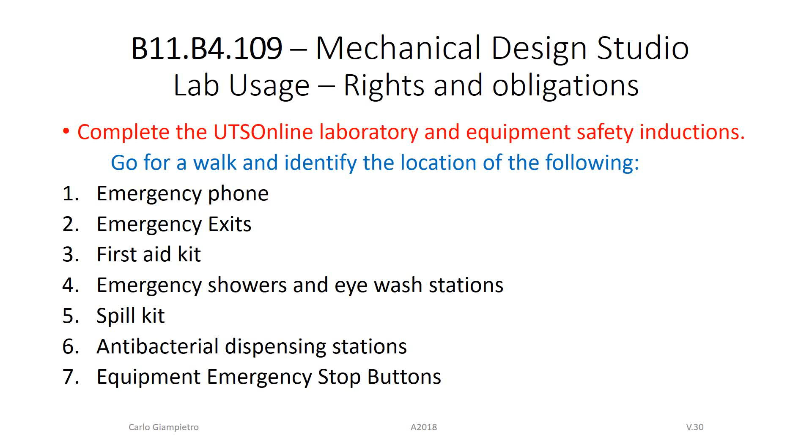Once again, the location of the mechanical design studio is going to be at building 11, the same building we have the lecture in. It's at B4, where you can use elevators 1, 2, and 3 to reach basement 4, and the room number is 109.

In the event of an emergency, if your lab supervisor is not available, you are going to dial 6 to contact security.

You have to remember to always return the tools to the designated storage areas, keep the floor area tidy and free from obstructions, always clean up the area once you've completed your activity, and always wear covered footwear when in the lab area.

The lab supervisor has the right to restrict entrance to the lab if you don't have covered shoes. Always wear eye protection when operating tools or machinery, or when in the vicinity of someone using the tools or equipment.

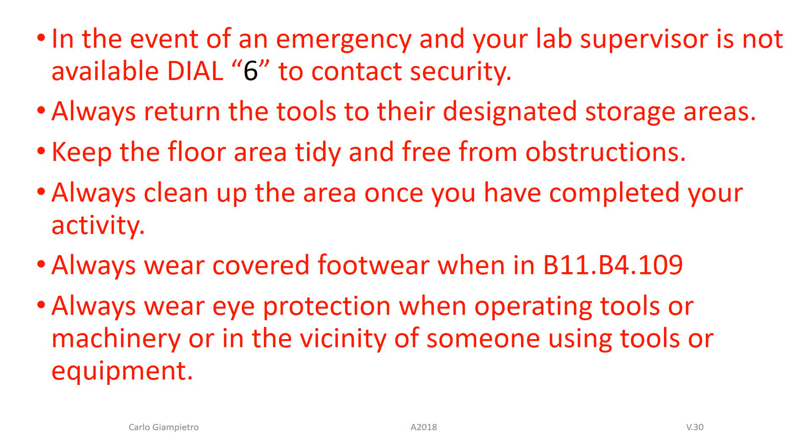Always conduct yourself professionally when working in the area, and report any bullying, sexual harassment, or antisocial or dangerous behavior. Remember that no food or drink are allowed to be consumed in the lab area.

Always wipe the loan safety glasses with antibacterial wipes before using them for your own safety. Also, report any damaged machinery or equipment to your supervisor or tutor immediately, and use the lockout and tag kit if necessary.

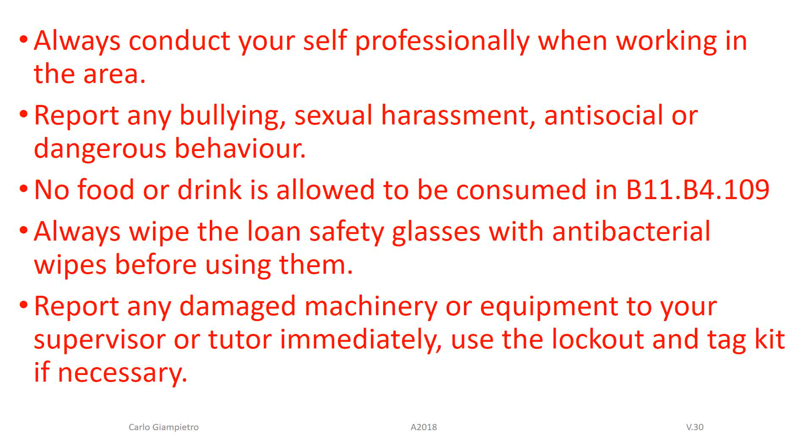Make sure that your tutor or lab supervisor instructs you in the correct operation of any machine, tools, or equipment, and address your lecturers, tutors, and supervisors appropriately.

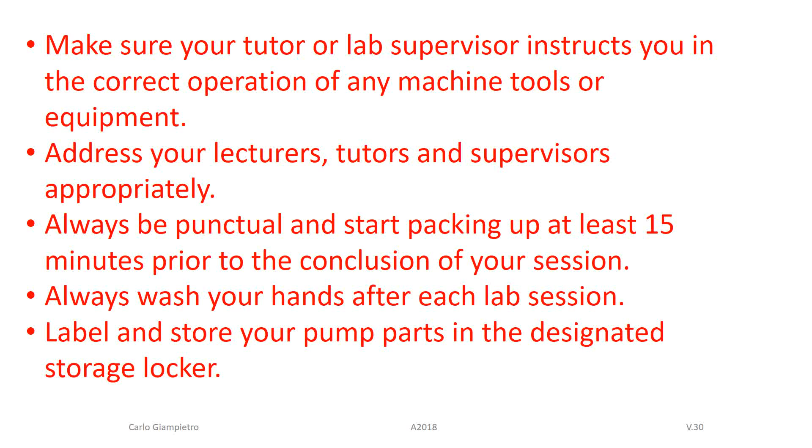Always be punctual and start packing up at least 15 minutes prior to the conclusion of your session. Always wash your hands after each lab session, and label and store your pump parts in the designated storage locker.

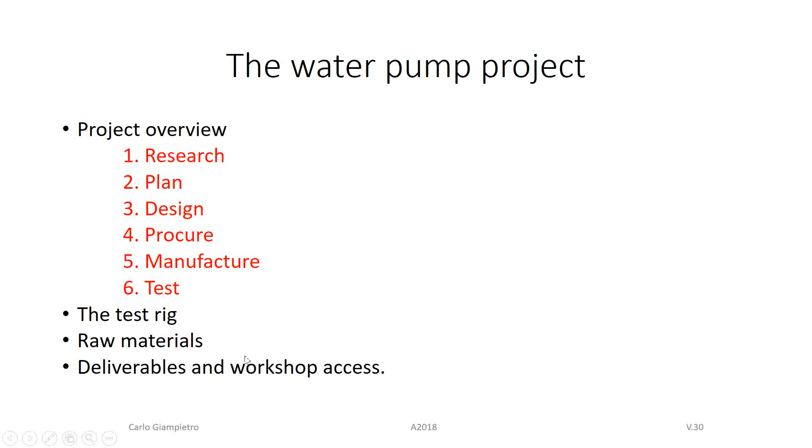For the water pump project, the project is going to include the research part, the plan, the design, the procurement, the manufacturing, and the test. You are going to have a test rig, raw material, and deliverable workshop access. That's what's going to be available for you, and that's what you have to complete, in red.

If you don't know where to start, you have to ask yourself the following questions: first, what is it, what the pump is; second, how does the pump work? Now, I think most of you did physics in high school.

Let's start from point number 1, what the pump is. The pump is a device which can simply, from the name, pump the water from the lower level to the higher level, or sometimes only increase the pressure to increase the velocity, so we can send it to a longer distance. How does it work?

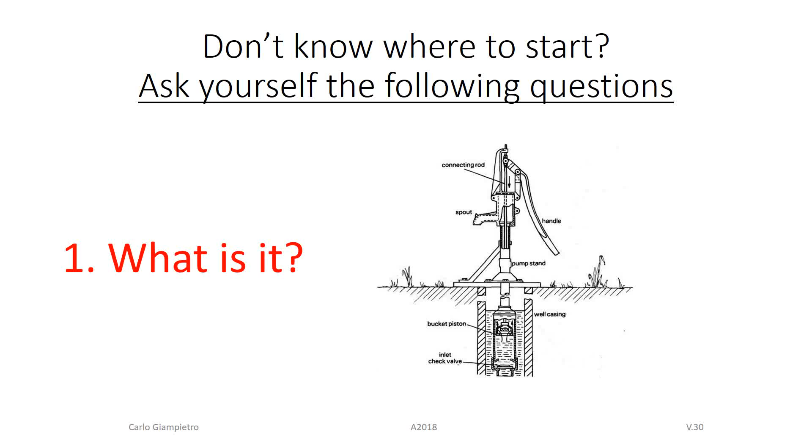Simply, it works using the negative and positive pressure procedure. As you can see in this diagram, starting from the first image on the right side, you can see that the water will get in as we generate a negative pressure inside the chamber.

Below, we have what is going to be the seal; the valve is going to be opened as we generate negative pressure between the piston and the cylinder, and this will attract the water in. After that, we push the piston down, and this closes the lower valve and opens the second valve within the cylinder, so the water is simply pushed up to a higher level.

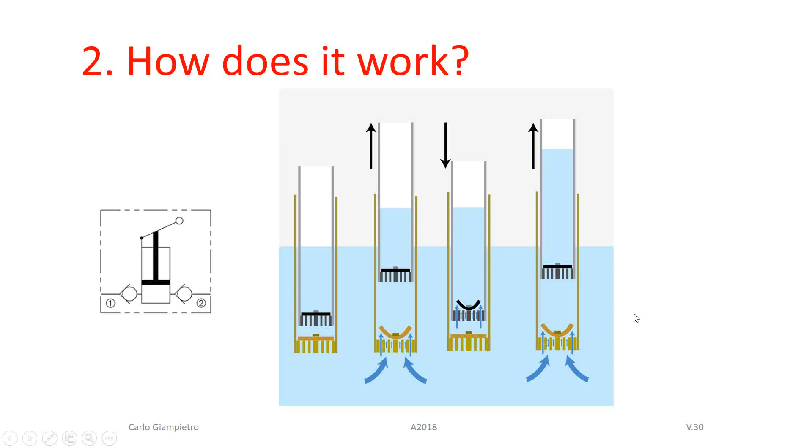By repeating this procedure, we are going to continuously pump the water.

So the other question is, how many parts are going to be needed? How many pumps do I have to manufacture? This question relates to selecting the material and the cost of the material at the end. Usually, manufacturing one part is going to be more expensive than manufacturing multiple parts.

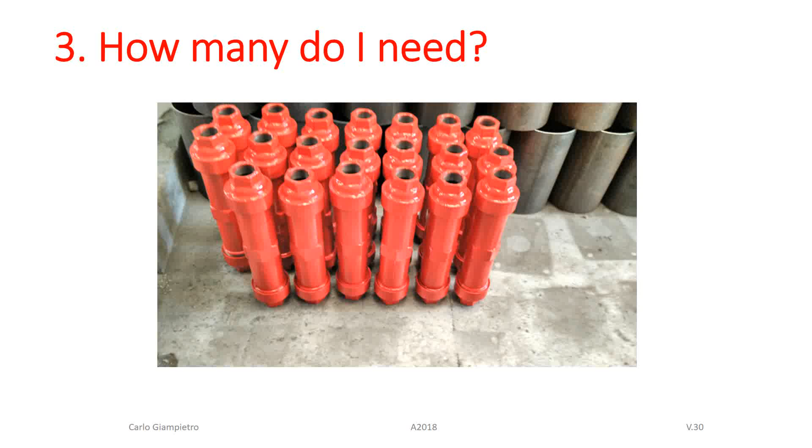This is simply considering the setting up of the manufacturing process and the requesting of the raw material. The other question is, how long does it need to last?

If you're going to make something, you should consider that the longer lifespan is better. You shouldn't do something that is disposable, where you use it once and then have to bring another part. If I'm going to make a product, I should always design it to last longer.

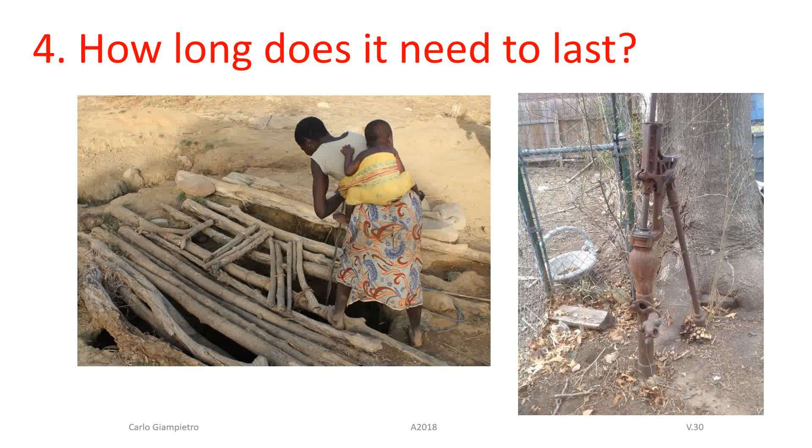Usually you move back and forth through the 4 manufacturing strategy questions until you come up with solutions: what is it, how does it work, how many do I need, and how long does it need to last.

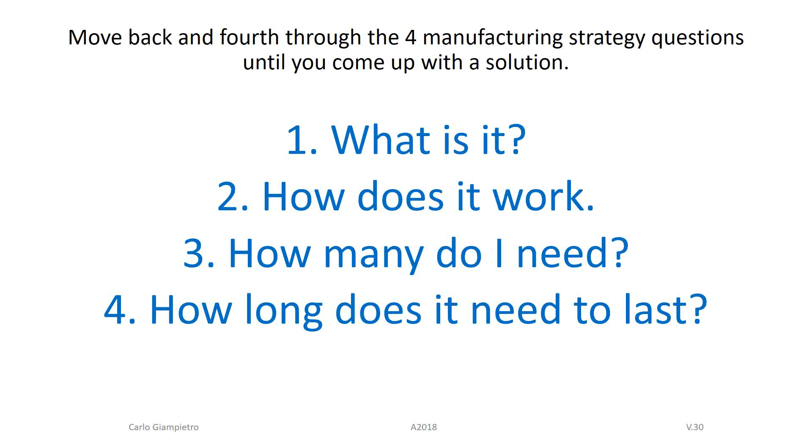Now the things you have to start doing before you go to the lab in week 4 is making the hand sketch. You have to make your own design before you go into the lab and start to think about the new design. We're also supplying engineering drawings.

This is an example of the engineering drawings we supply for you. This is the pump design, and these are the multiple parts. You can see that the names of the parts are mentioned in the table at the left bottom corner.

So the pump main body is part number 1. The pump shaft main is part number 2. Part number 3 is the pump handle. The main piston is part number 4. The 6mm nylon nut is part number 5. Part number 6 is the foot valve, and part number 7 is the washer.

We have the small washer, part number 8, and part number 9 is the 6mm nylon screw. Part number 10 is the PVC junction, and the cap is part number 11, and the last part, number 12, is the joiner socket.

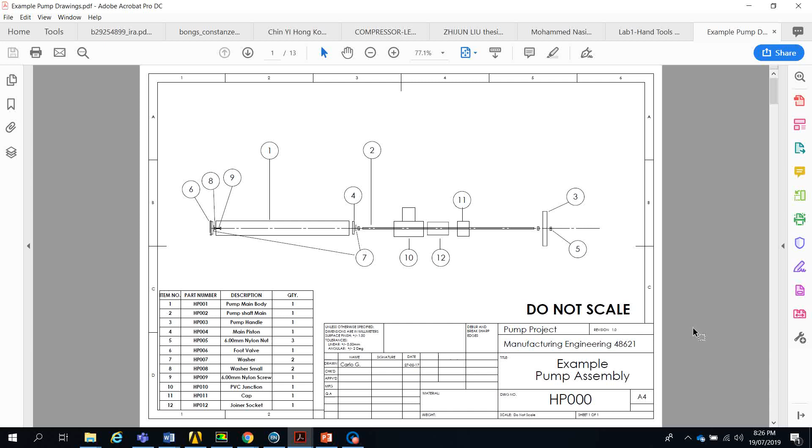So the parts individually can be shown in the following drawings. You can see the 38mm internal diameter cylinder, which represents the pump main body, and we also have the pump shaft main.

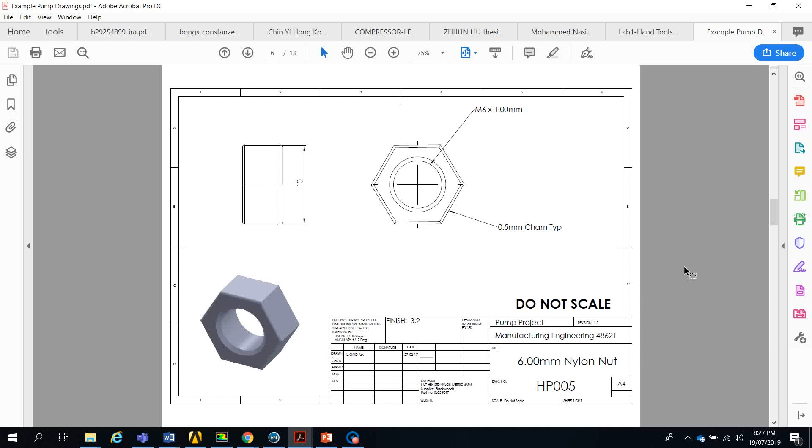We have the drawings for the pump handle, the main piston, the 6mm nylon nut, the foot valve, and the small washer. We also have the 6mm nylon screw, the PVC junction, the cap, and the joiner socket.

Okay, so all these raw materials will actually be supplied to you by the school. The only thing you have to do is play with the design process.

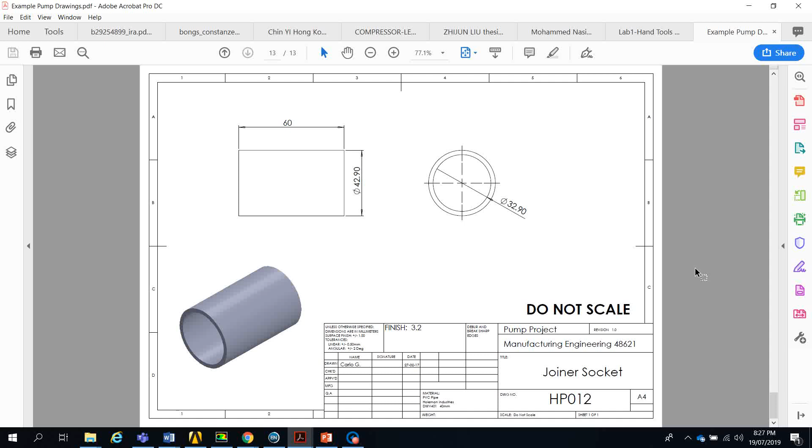For example, for the joiner socket, the cap, and the PVC junction, these are off-shelf items, so you only have to use what you have. But you can do some modification, for example, for the foot valve.

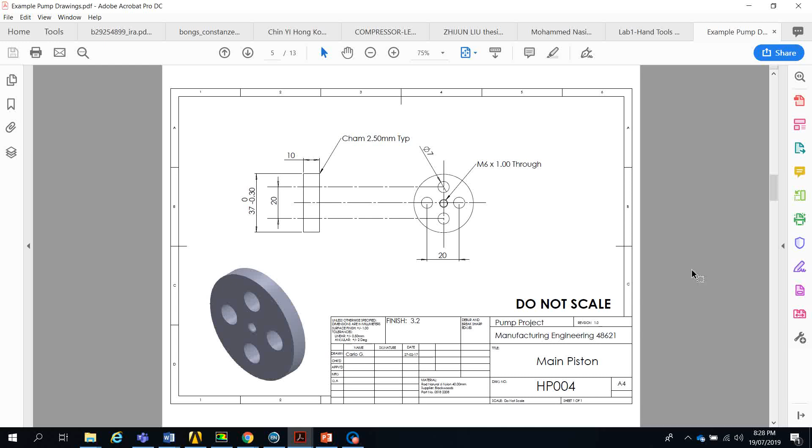What else, the main piston - you can simply change the washer type. Whatever increases the pressure is going to increase the mass flow rate you're going to have from your pump.

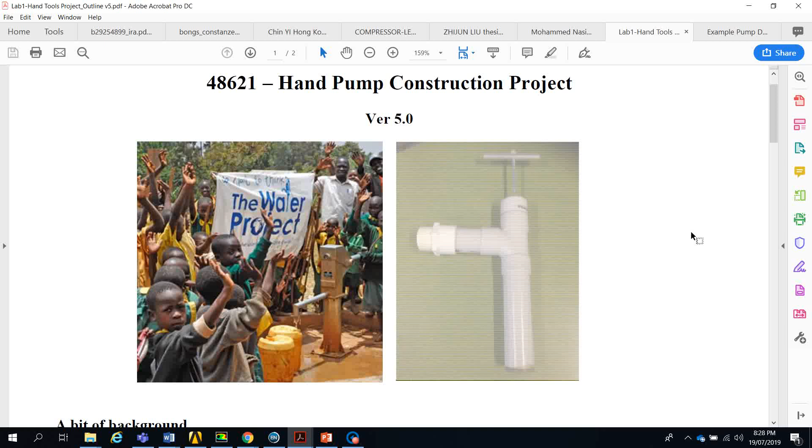The following sheet also will be supplied to you. It's going to be more detailed than the one we had in the presentation earlier. This one shows you the background of the pumps.

We know that fresh water is essential for life, and there is enough fresh water everywhere on earth, but the problem is how to get the water to everyone. Most countries actually have a lack of fresh water, and many people are dying because of the lack of clean water.

We can dig a well, but we need something to pump the water out of the well. So the challenge for your project is to work in a team environment and develop a pump system that can pump the largest amount of water within a given time frame with the least amount of power.

The test rig we are going to have is a motor which will take the handle of your pump up and down, pumping the water. It's going to run at a constant speed for a certain time, and by the end we will check how much water has been pumped by your pump during this limited time and how much power has been used.

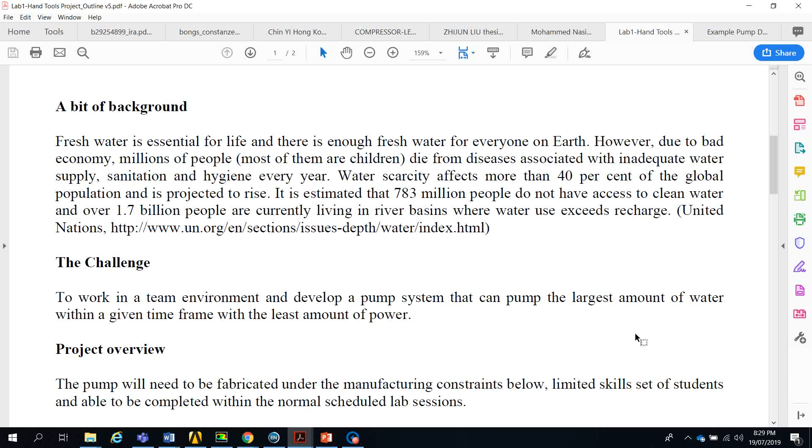Okay, so definitely the pump which pumps the largest amount using the least amount of power is going to be the winning pump.

So once again, the project overview: first, the pump will need to be fabricated under the manufacturing constraints below. We have a limited skill set of students, able to complete it within the normal scheduled lab sessions. There will be 3 sessions, each running for 2 hours. This will be the practical sessions, including 1 of 2 hours for test and assessment sessions.

Of course, the first session is going to start at week 3. The construction will be based simply on teams competing with each other, and a test rig will be adopted to automatically run and test the hand pump. Access to technical staff for advice and assistance will be available during the lab sessions only.

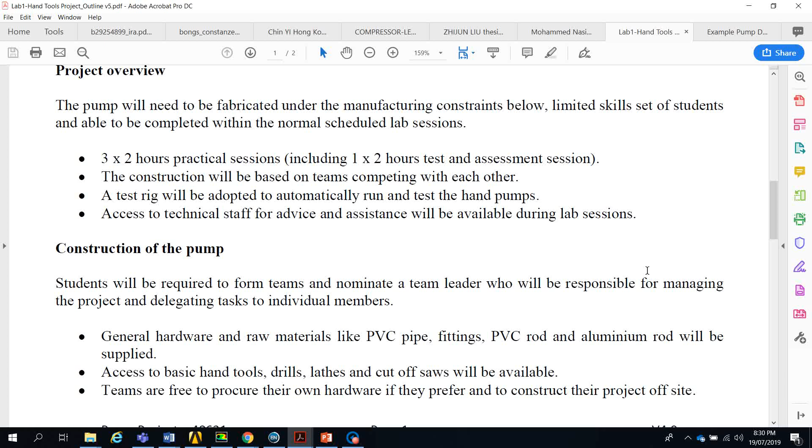Now we're coming to the part of the construction of the pump. The students are going to be required to form teams and nominate a team leader who will be responsible for managing the project and delegating tasks to individual members. The general hardware and raw materials like the PVC pipes, the fittings, the PVC rod, and the aluminum rod will be supplied by the school.

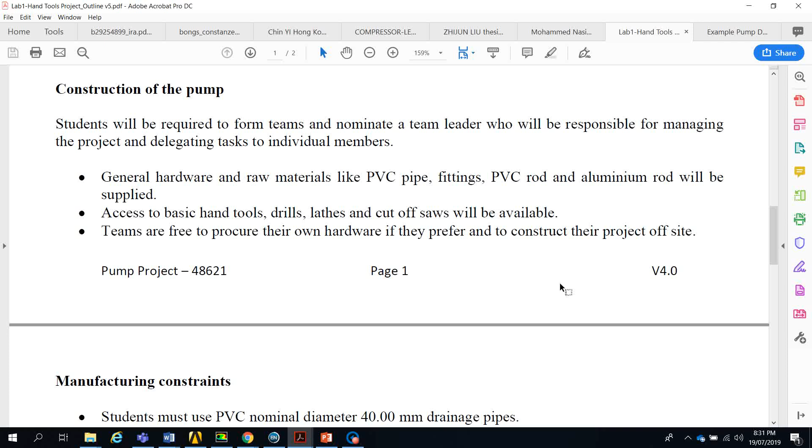Access to basic hand tools, the drills, the lathe, and the cut-off saw is also going to be available. The teams are free to procure their own hardware if they prefer that, and to construct their own project off-site. The students must use a PVC nominal diameter of 40 millimeters, that's for the outside diameter, which is the standard drainage pipe.

A maximum stroke of 100 millimeters, and you can have plus or minus 5 millimeters longer or lower, which are the tolerances. A 25 millimeter long M6 thread is required on the end of the piston shaft for the connection to the test rig, and the size constraints are shown in figure number 1, as you can see. So the maximum is going to be 500 millimeters. We are going to have 190 millimeters plus or minus 5 millimeters for the retracted part.

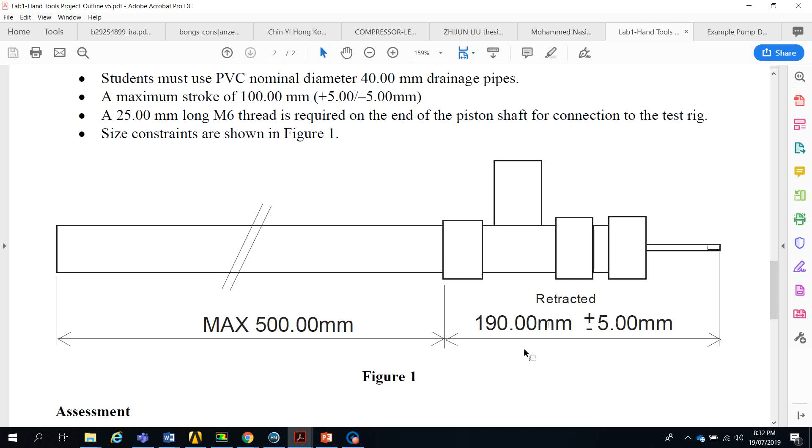Now the assessment is going to be as follows. First, the fabrication and the run of the pump, which is going to weigh 50% of the total marks for this task, where each team will have a schedule of 10-minute assessment sessions, including 5 minutes for the setup. Once the test setup is completed, the pump will be run for 2 minutes with the flow rate, pressure, and power readings taken every 15 seconds.

The parameters to be measured, including the start of flow, are going to be the water weight, the current value at 1 minute, and also the flow rate in liters per minute. The total average will be recorded, and the team ranking will then be derived. The scaled mark of the pump test will be calculated based on the team ranking. In the event of catastrophic pump or test failure, a second attempt may be allowed, and a 20% penalty will be applied to the test score.

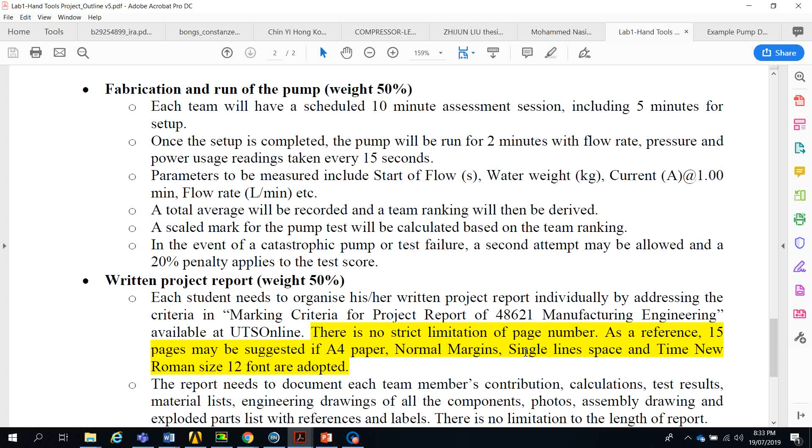So for the last point, you have to be sure that your pump can work properly, and you are going to have a good design in which fatigue failure is prevented. Now, another 50% weight is going to be given to the written project report, where each student needs to organize his or her written project report individually by addressing the marking criteria for the project report of

manufacturing engineering. The marking criteria for the project report are available on UTS Online, and there is no strict limitation on the page number of the report, and as a reference, 15 pages may be suggested if A4 paper is used. You have to use normal margins, single line spacing, and Times New Roman font.

The report needs to document each team member's contribution, the calculations, the test results, the material list, the engineering drawings of all the components, and photos of the assembly and the exploded parts, with references and labels. There is no limitation to the length of the report, as we mentioned earlier. The report will need to be submitted through UTS Online as an electronic copy, and you can find the links for submitting the reports in the assessments folder on UTS Online.

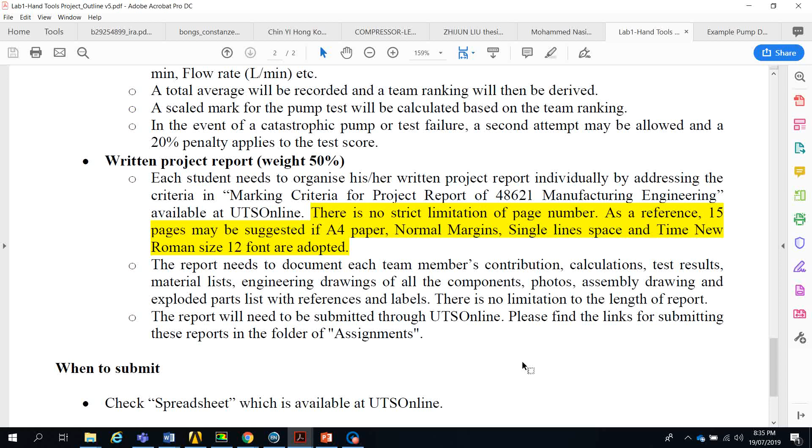Now, for when to submit, simply click this spreadsheet which is available on UTS Online, which is going to show you the due date for each assignment. Okay, now I hope that you understand what the project concepts are, and if you have any questions, you will be able to discuss them with myself as well as with your tutor during the lab sessions.

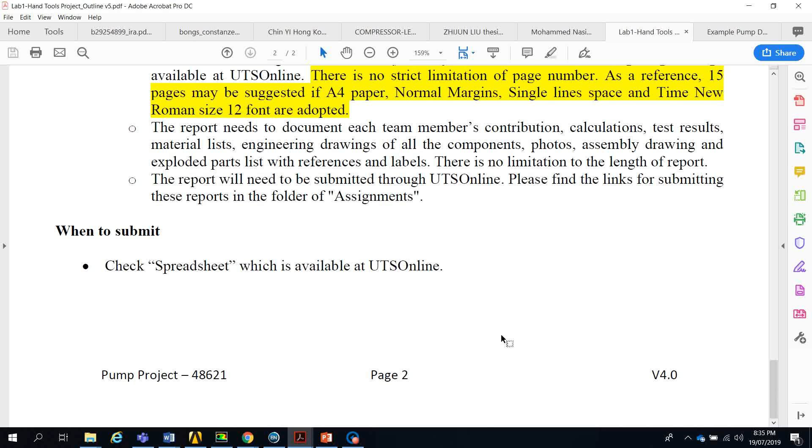But once again, just remember that you have to have the preliminary design of your pump before you go into week number 3. Actually, start to create the teams from week number 1, so you're not going to lose time to start your project, and you can finish it within the 3 weeks for this task. Thank you very much, and enjoy the rest of the day.